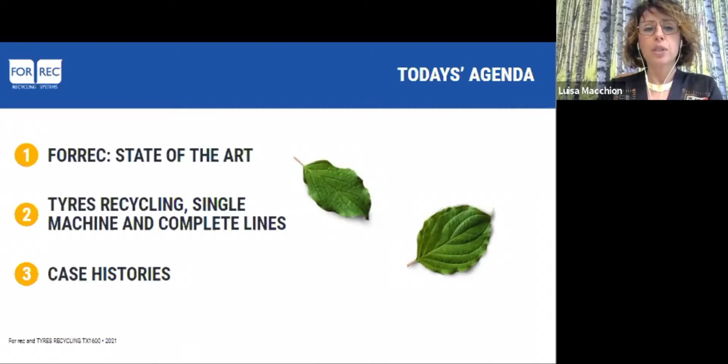Today's agenda will be a state of the art of the company. So we're not speaking only about who Forrec is, but exactly the point of our business, the state of the art. The reason you are connected to this webinar is the tires recycling system, so we will speak about our technology, our innovation, and our case histories in order to give you a real and concrete idea of what we do and where. Now I leave the word to Mr. Zoccarato, who will speak about Forrec.

Before going through the interesting things and the technical part of the presentation, I would like to share with you the satisfaction concerning the growing of Forrec and the success of Forrec, despite unfortunately the COVID situation. This growing certifies that the philosophy that we apply on the market is the right way to achieve great targets.

As you know, we are a company absolutely customer-oriented. We pay great attention to after-sales service, and all our installations and machines are as unique as DNA strands. This means that we work and match our skill with the knowledge of the customer to make a tailor-made project, with the goal to realize the perfect system to solve the recycling issue that our customer has. I like to use a couple of letters, the R and the E.

Re, as recycling, that is our core business and our mission. Forrec was born with the ambitious purpose to give new life to everyday produced scraps, with a hand to preserve the environment.

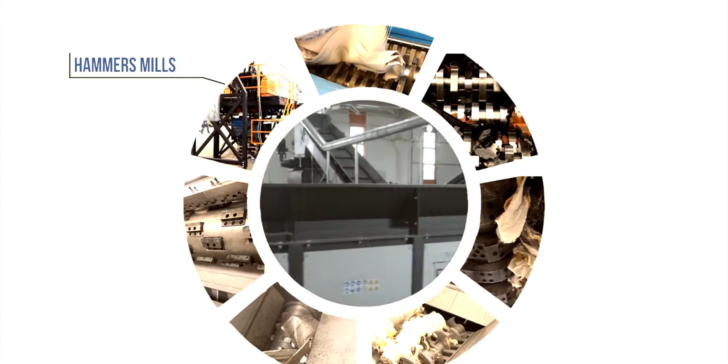I hope you enjoyed the video, and here's a link to the last part of the video.

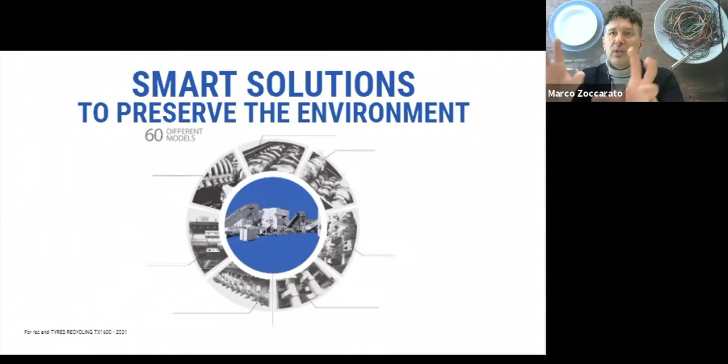I would like to give you an overview of our main products because, of course, we produce complete systems, turnkey systems, tailor-made projects, but each plant is composed of different kinds of machines.

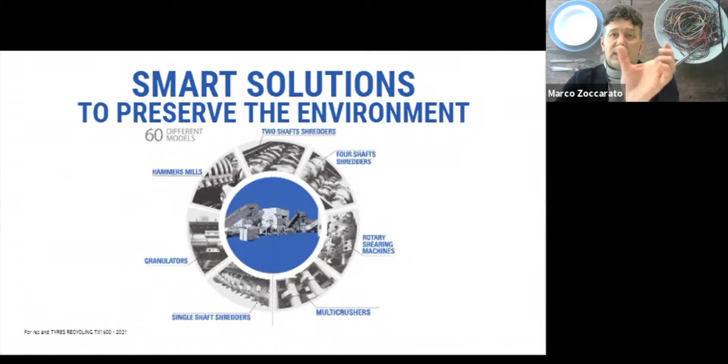We have about 60 different models in our range of products, starting from the two-shaft shredder, going through the four-shaft shredder, rotary shearing machine, multi-crusher mainly used in municipal solid waste, single-shaft shredder, granulators mainly for plastic recycling, and compact arm hammer mill dedicated overall to metal scrap processing.

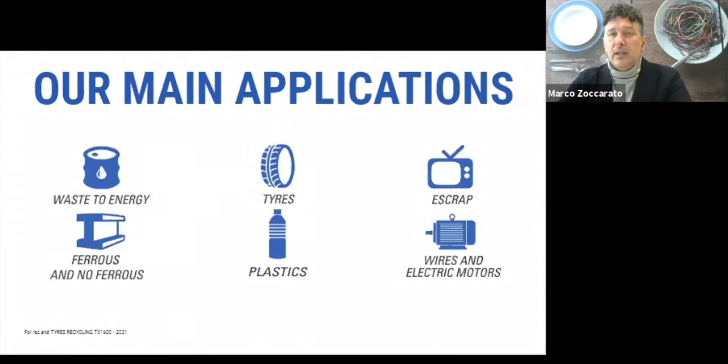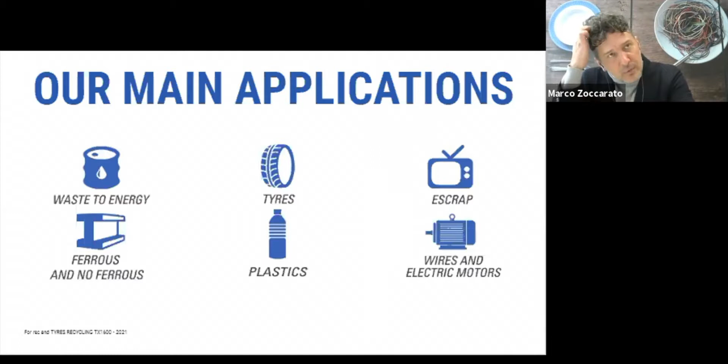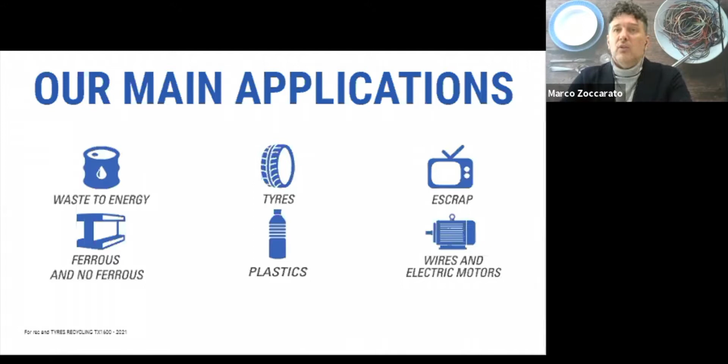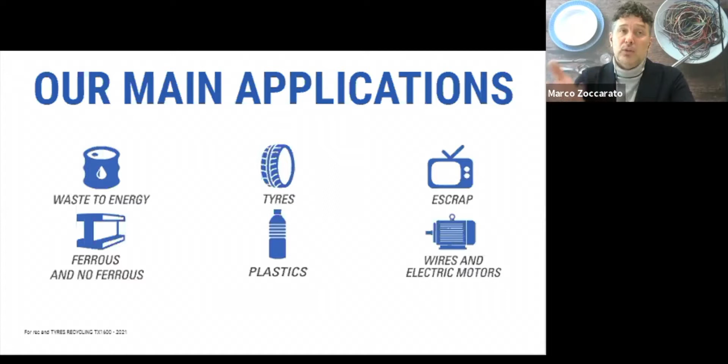So these machines are useful for different applications, for example waste to energy projects, tire recycling projects, and e-scrap. When we talk about e-scrap, we are referring to very large sectors in terms of electronics, starting from refrigerators with high technology systems, household washing machines, and dedicated systems for ferrous and non-ferrous treatment and processing. We are also involved in a lot of projects in plastics recycling, and also in copper wire and electric motors for copper recovery.

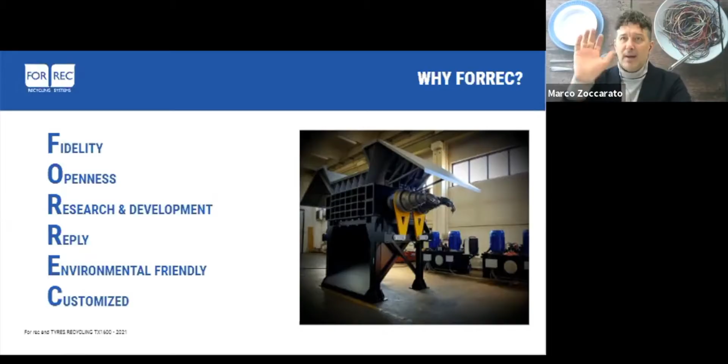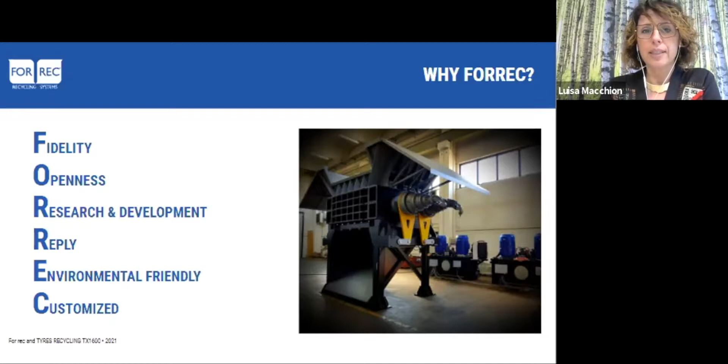Okay, thanks Marco, thanks for your presentation. So now we go on with the reason for this webinar, which is the tires recycling system. As Marco informed you, Forrec is a manufacturer of single machines and also complete installations for the treatment of tires.

But to start speaking of tires, we would like to define which kind of tires we are speaking about. The most common scraps are car tires, truck tires, and pre-cut dumper truck tires. When a tire no longer has the indispensable characteristics for safe and efficient performance on a vehicle, even through retreading, it becomes out of use. So it becomes a waste. It must therefore be collected for recovery and recycling, which takes place in special plants.

The rubber from which the tire is made up is a mixture of very high quality polymers with exceptional chemical and physical characteristics that remain unaltered even in recycled rubber obtained from it. So end-of-life tires can be sent towards two alternative options: first, recycling, from which new materials such as rubber, steel, and textile fibers are obtained, or recovery as energy in ad hoc plants, mainly cement factories. ELT, which means end-of-life tires, have a calorific power equal to that of coal, but with much lower climate-altering emissions.

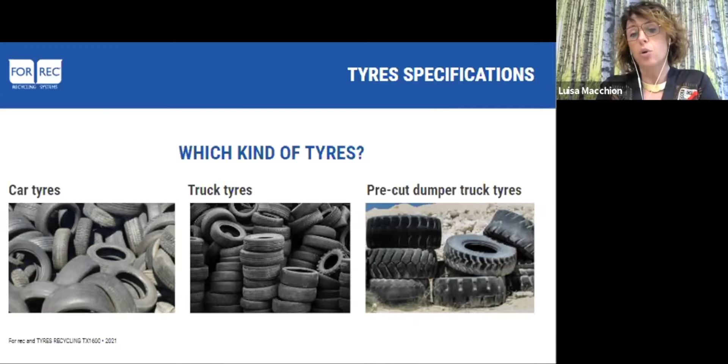For material recycling, the ELT are sent to special plants that, through mechanical grinding, reduce them into smaller and smaller fragments until the three components of the tires are separated: rubber, steel, and textile fibers.

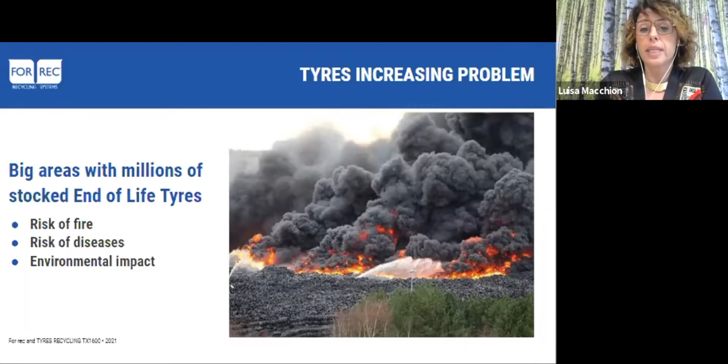So the treatment of end-of-life tires has always been a problem for all areas in the world, from the most industrialized areas, where the presence of many vehicles causes a large quantity of waste, to the most remote areas, where unfortunately this type of hazardous waste is stored in vast abandoned areas with harmful consequences for the environment. As you can see in this picture, often this waste is the cause of fires, and this has important consequences for the health of people, because such an area is an ideal environment for the proliferation of diseases and pests.

So now let's speak about Forrec projects and the treatment of end-of-life tires. Forrec, as we told you, produces single machines and complete systems for the treatment of any type of solid, urban, and industrial waste, and for almost 15 years has been present on the market with reliable and effective solutions. Forrec's complete system allows obtaining a rubber granule with a size between 0.8 and 4 millimeters.

And with this recycled rubber, innovative and eco-sustainable products are made. These products find application in sectors that are very different one from the other, from products for the building industry, such as acoustic insulation and vibration damping, to sports with playgrounds, soccer pitches, multi-purpose sports flooring, and products for animal welfare, for instance.

There is also the sector of roads and infrastructures, where alongside modified silent and durable asphalts, we find cycle paths, street furniture, and elements for road safety. The panorama is completed also by design products, objects and new compounds made by combining recycled rubber and thermoplastic materials. Various treatment lines of this type have been installed by Forrec in different areas of the world and are currently operational.

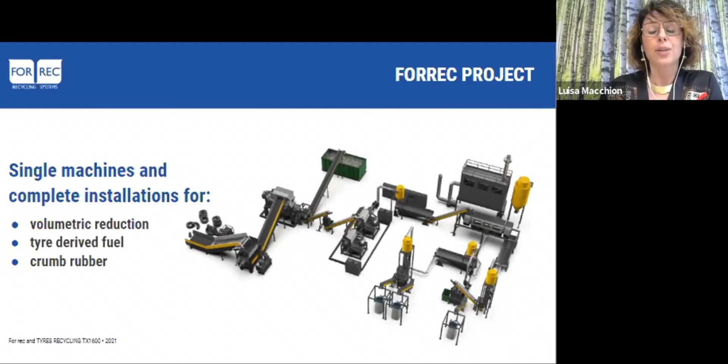The energy recovery of ELT is in fact a fundamental component for ensuring 100% of the virtuous cycle of ELT recovery. This process starts with a volume reduction.

The Forrec primary shredder is the right machine for this. It's an efficient and robust industrial counter-rotating shredder designed for effective performance during treatment involving a reduction in volume and shredding of materials with partial control of output size. It's designed to achieve high torque and operates with low RPM, therefore featuring very low consumption. The shredder blades are made of special steel, sometimes with screw cutting sectors, ensuring long life cycle and reduced maintenance.

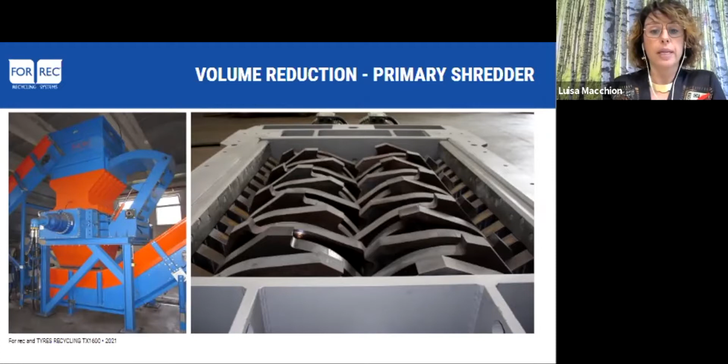The energy recovery from ELT, end-of-life tires, derived materials is mainly carried out in cement factories, whose high operating temperatures ensure compliance with emission limits and allow making the most of the high calorific value of rubber, which is comparable to that of pet coke. Moreover, the use of this process allows recovery of combustion residues, ashes and steel as materials, which are incorporated into the finished product, thus avoiding the use of further virgin raw materials with environmental and economic benefits for companies and also for the community.

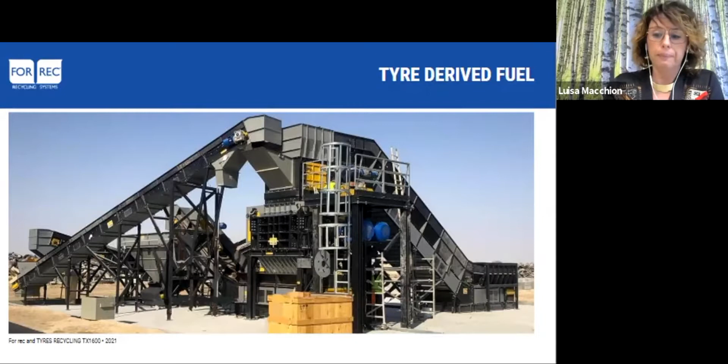In order to obtain a very good tire-derived fuel, Forrec has designed, projected, produced, and also installed, and now has operative, the new TX1600. Speaking of WTE, waste to energy, the most delicate phase is that of primary shredding of the product for TDF.

This treatment requires that the output product be of well-defined dimensions with the characteristic of a clean cut, not frayed. Considering the importance of this waste, Forrec has developed the TX1600 shredder with the aim of meeting the specific requirements of this market segment, without neglecting productivity and keeping an eye on the relationship with production costs.

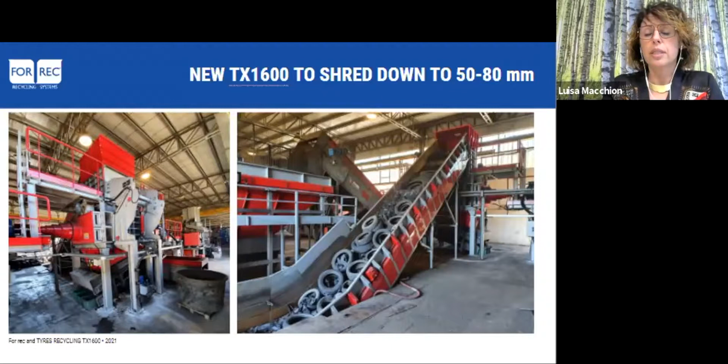So now we have here the data on the dimension of the output material, which is from 50 to 80 millimeters. And here is an example of the clean cut material. The clean cut is very, very important in this moment.

The TX1600 has a very sturdy structure, 2 motors of 132 kilowatt each, and an easy way to replace the cutting plate. There are cutting plates and not single blades. There are some guiding shafts on the cutting chamber, which help the tires enter the cutting area.

The input capacity is up to 8 tons per hour, and this is a very great result that we achieved. The output dimension, as I told you, is from 50 to 80 millimeters. And as we said before, this is the perfect product for the cement factories.

The machine has been specifically designed for the so-called clean cut, which means a shredded material with a defined dimension and without frayed steel wire. This frayed steel wire means real difficulties to process the scrap inside the cement furnace. That's why the clean cut is a great goal that we achieved with this machine.

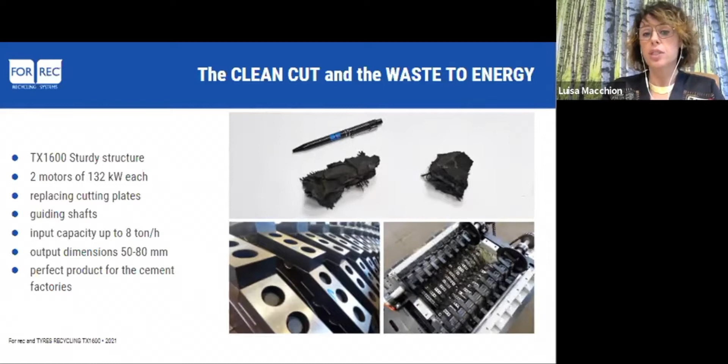So here is a short video of the line we have recently installed in Abu Dhabi. The customer was interested in getting a clean cut material. Please take a look at the video.

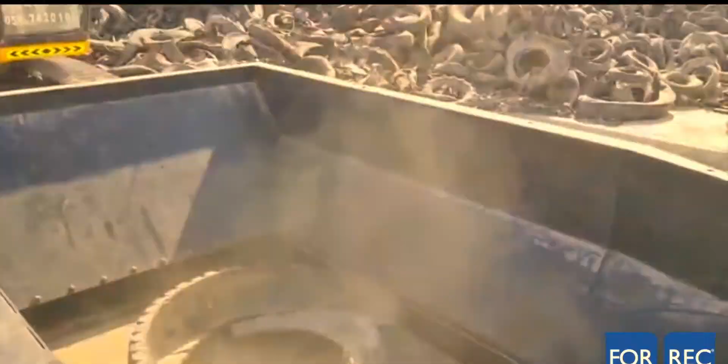So just to summarize what we have seen till now, this is a simplified representation of the line, which starts, as already explained, with the primary shredder to have a rough cutting of the tires.

For the complete line, we do not need a perfect clean cut and calibration of the output material. A simple volume reduction is enough to be further processed by a secondary shredder, a grinder, which is a single shaft shredder with a sieve underneath to define the output size of 20 to 25 millimeters.

The line continues with granulation. We use a faster turning milling machine with a sieve in order to obtain crumb rubber of dimension inferior to 4 millimeters. The process does not end with the shredding, of course, but we have designed a system to collect all the dust and textile left during the process, with different points for separation of the metal fraction and final collection of secondary raw material.

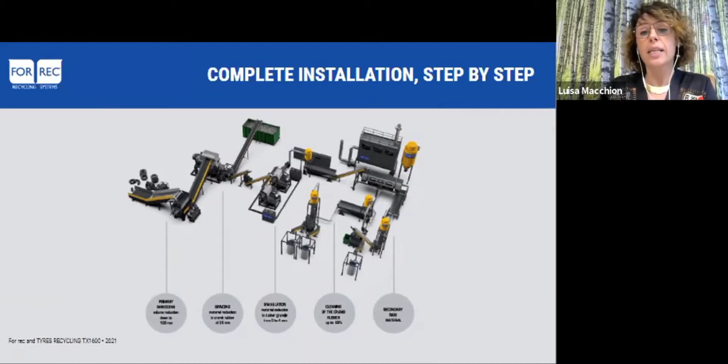So this is an anticipation of our case histories. This is an installation working in Belarus, a company including a technological park for the treatment of waste in Minsk that has chosen Forrec for the supply of a complete line for the treatment of tires initially. This line can process 6 tons per hour.

And then they completed their technological park with a refrigerators treatment line and an e-scrap treatment line. So just to summarize how a big structure for recycling can be done. On the right, you can see the crumb rubber they get from the installation. We actually used to have 3 different dimensions in output: a dust, which was almost a pulverized crumb rubber, a second output from 1 to 2 millimeters, and the last one from 2 to 4.

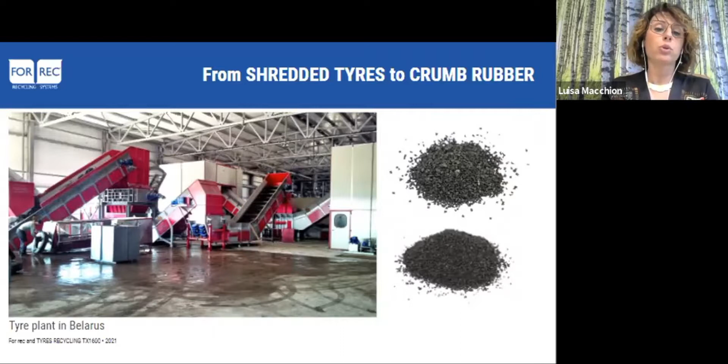So seeing is believing. Just to inform you that our installations are real and our customers too. We can show you our technology in action, both at our premises, where we have a testing area with the possibility to do some in-house tests with your own product.

And sometimes we have some warm and hospitable customers using Forrec machines who allow us to test or to see their activity from inside.

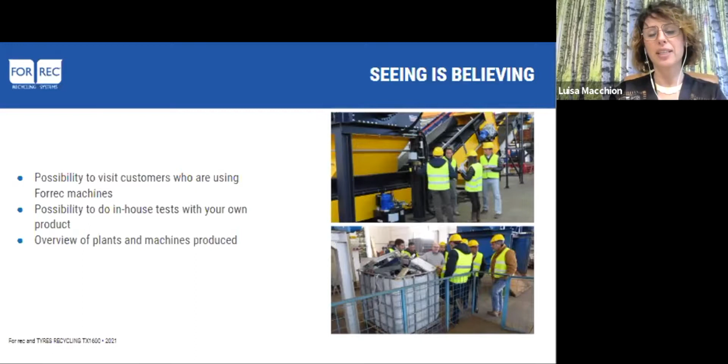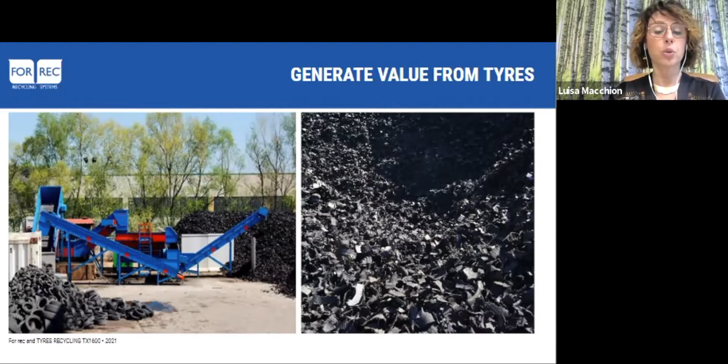So as I promised at the beginning, some case histories. These are installations placed all over the world. This is, for instance, a system for TDF, the argument we dealt with before. So this is an installation for the generation of value from tires, producing cut tires to produce energy to be sent to the cement factory.

This is our secondary shredder, which is a grinder. The name of this machine is MR, and this is the output material it gives, which is shredded tires of about a medium dimension of 20 to 30 millimeters. In this state, there is textile and metal fraction inside, but with the following steps of the installation, these scraps are separated from the tire, from the rubber.

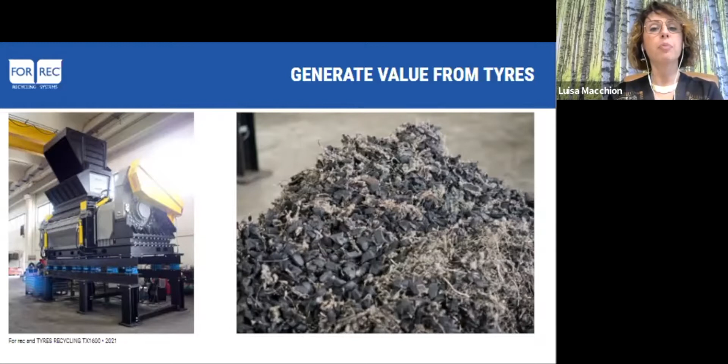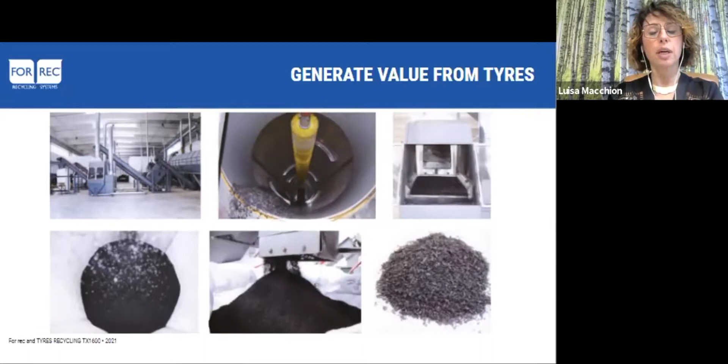This is another example of a tire-derived fuel installation, and these are 3 steps of the complete installation. In the first part, you can see some screw conveyors, a suction system, pneumatic transportation, all the systems useful for the separation of textile and metal scraps, metal fraction from the rubber, and also the 3 dimensions that are in the output of the installation.